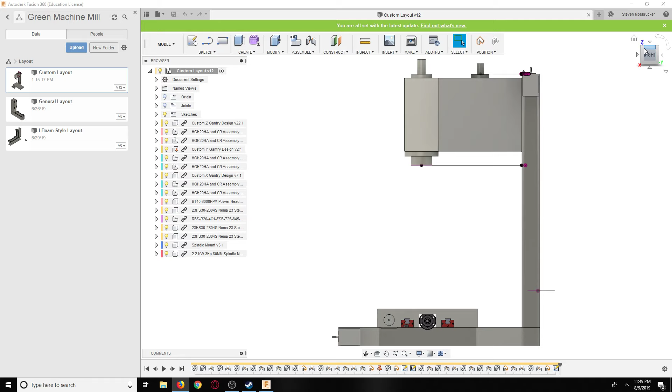So we have some pretty good news. Every time I start talking, my cat freaks out. It's super annoying.

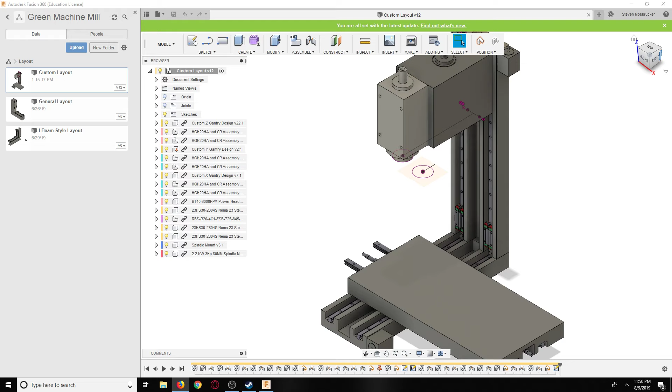Comparing the 1100M to the new series, not the old series. It turns out, like we said in the other video, that the 1100M has dovetail ways still and not linear rails, as far as what I saw. Cast iron frame and table with hand scraped ways, basically.

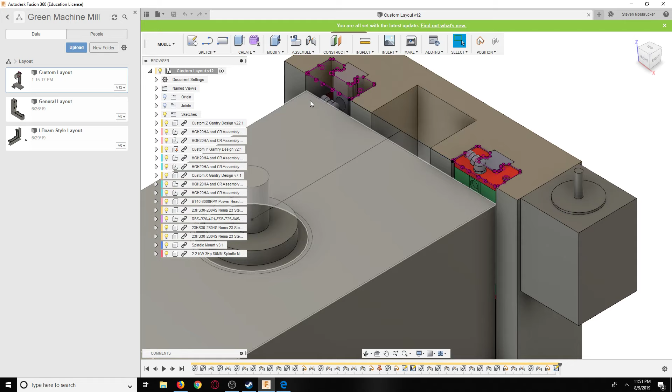So a little bit shorter there, but where we do make up for it is we are pretty much at max travel. So maybe I should put this guy in here - this will help it a little more for the tilt. Also I noticed I didn't have these set so that they move together, so I'll have to fix that at some point. But if we look here, we're at max position pretty much.

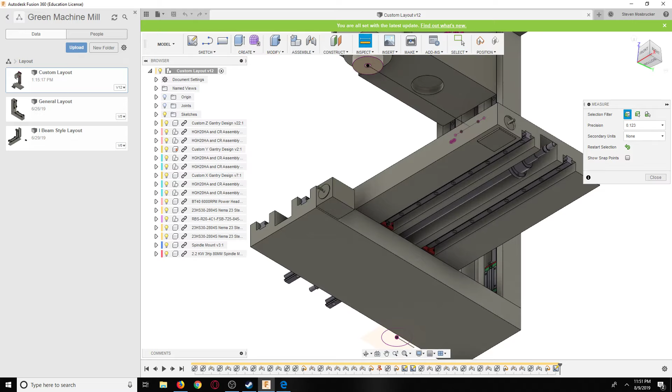One of the things is spindle nose to table max clearance. Here's the spindle nose, and of course we're going to have some drive dogs - or jaw dogs, spindle dogs, whatever they're called, the little blocks that go in here. I'll just call them drive dogs. Anyways, distance from here to the table is 19.245 inches, and theirs, max to table, is 17 inches.

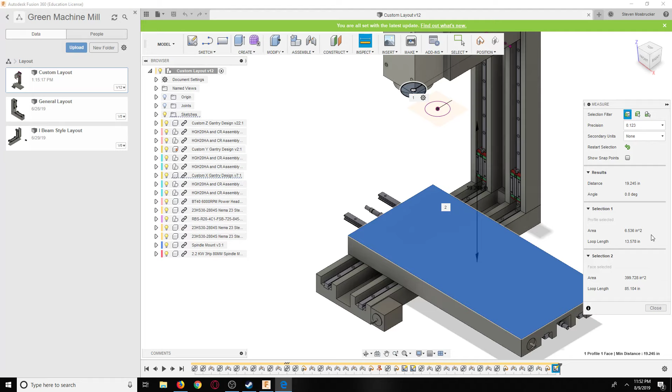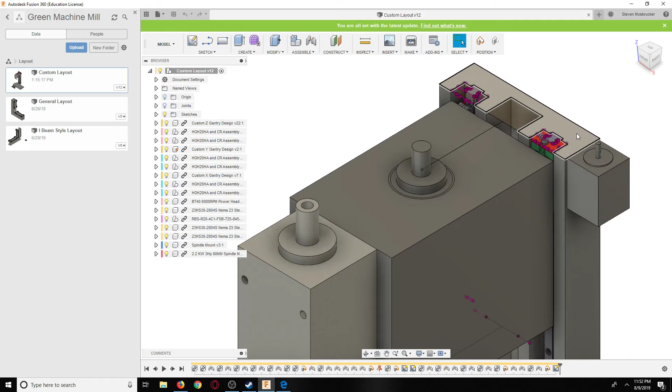So we have another 2.25 inch clearance there, and if we move this back a little more we'll have even more - down we'll have another half an inch. So it's 19 3/4, almost 20 inches, so almost 3 inches over the Tormach 1100M.

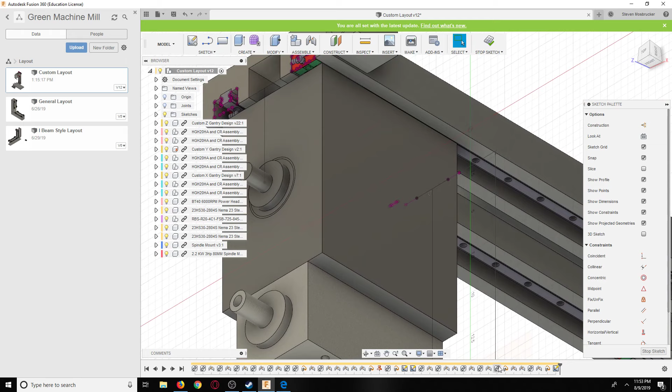Then for center spindle, which is this sketch here, spindle to column clearance - it says spindle center line to machine column. Let me rotate it. It is 13.945, and theirs is 11 inches. As you can see here, 11 inches and 17 inches max clearance.

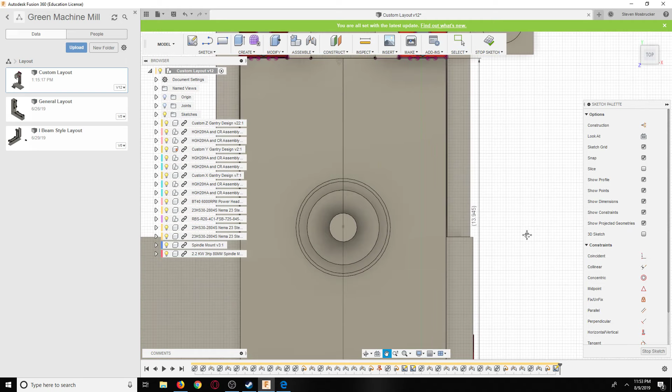So far we're right at kind of the same size, and again we're at 820 pounds. We're currently quite a bit under the typical system footprint, but theirs is 1,600 pounds, so we have another 800 pounds left. They have a lot of housing around this thing, and they won't tell me - I might need to find out exactly how much weight the machine itself is.

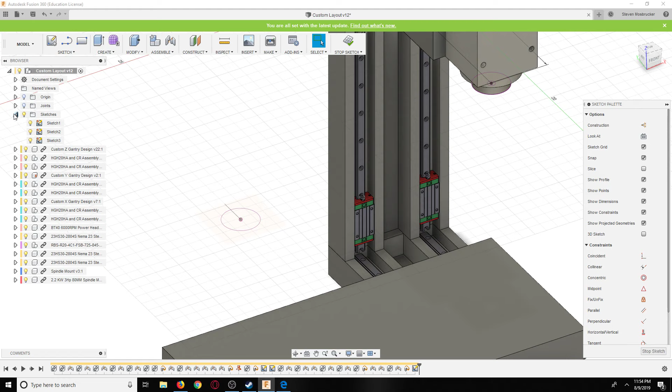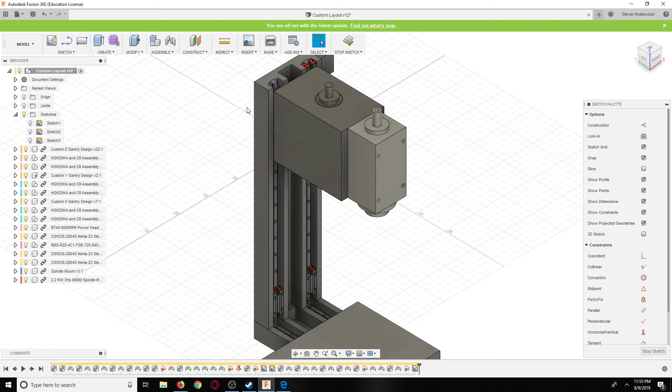In the last one we figured out how to get this guy in here. Another thing I was thinking about yesterday right before I went to sleep is holding this up, because obviously we need a counterweight. Usually they have a counterweight, but this is going to be against the wall or really close to it so it doesn't vibrate. It'd be nice to even attach this to the sheetrock, have some things here so when it vibrates, it dumps some of the vibration into the wall.

We don't have any room here, and we might have an ATC over here, an automatic tool changer, so we don't really have a lot of room here. So one of the things I was thinking is to do the exact same thing as the Skyfire CNC.

Oh, no way - do they have a... okay, so it looks like they have a new supplier in Canada, Skyfire CNC Canada. That's cool. So when you type in Skyfire CNC, that's what opens up. So ours is even bigger here than the Skyfire SVM2, which is their biggest one that they have. That's interesting, so let's go here.

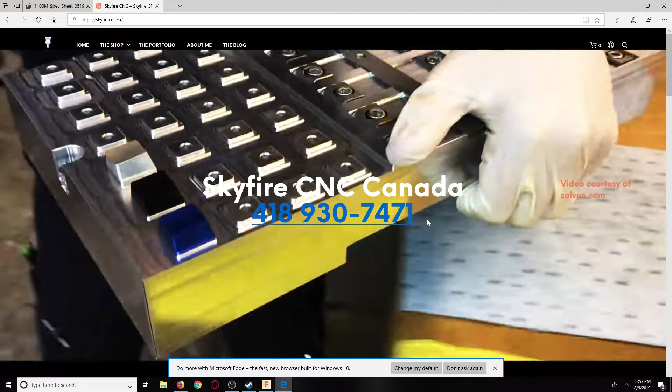So yeah, we could do this. This is definitely possible. How are they holding it down on there? Oh, they're bolting it in from the bottom? Yeah, they're drilling something in there and then putting it into the bottom. Oh, they're keyboard keys. Yeah, keyboard keys.

So let's see if we can find one. Okay, so this one has a counterbalance and it has room for a counterbalance, but... huh, so 10 grand pretty much.

Anyways, okay, so let's go to their main website. Oh, here it is. So if we go to categories and we go down here, oh, that must be their old version. Where did I see that?

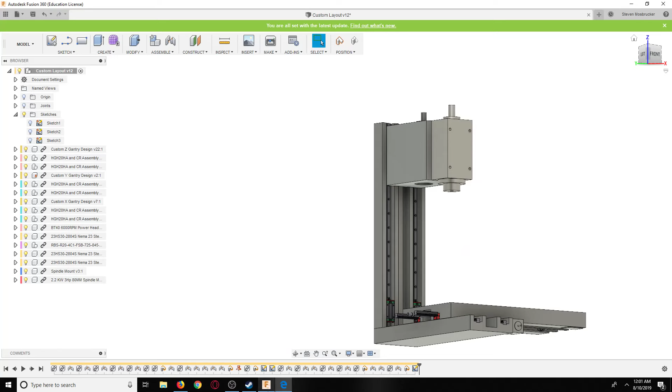The idea of why you have to counterbalance a machine is so that when your motor is up here working, you don't want it to have to hold the head up, right? Because the head is extremely heavy. I mean, ours here is extremely heavy.

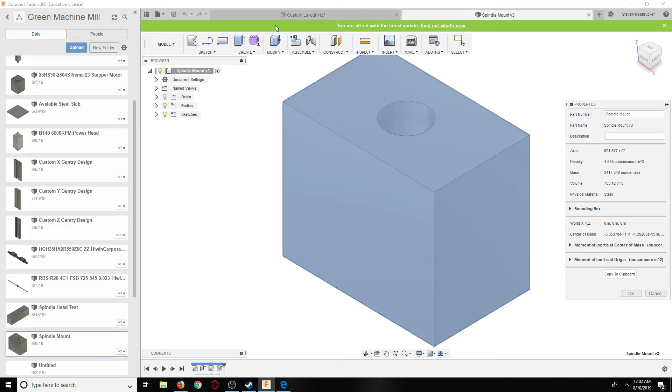I mean, this one right here is 3,000 ounces. It's 200 pounds, that block right there. Chances are the block is not going to be as heavy as that, but you could think with the motor and stuff, at least the head, we're going to have 200 something pounds.

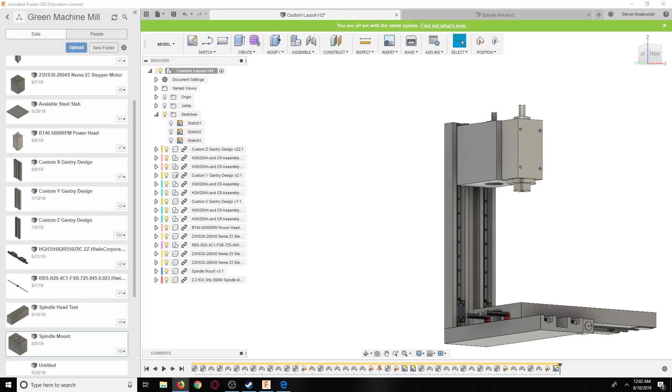And so pretty much either you need a 200 pound block hanging over here, or you need a shock that attaches here and goes up to the head, which I think is the better of the ideas, to have a shock like this. And you can see it goes up to the top of the head, and it holds the head up.

So you can see right now it's not energized, nothing's on, but the head is stationary, it doesn't fall to the table. And so pretty much what holds your head into the cut, what holds your head and thus the tool in the cut, is the motor, not the counterbalance, or not the weight of the head.

Theoretically, the head weight is supposed to be weightless. It's supposed to be zero force, because if there is a force, when you shut it off, it's going to come down and slam the nose onto the table. So you need to either hold it up with something that will still allow it to move when you turn it on, or something that deactivates when energized.

So pretty much not very many of your cutting operations are going to have that type of load, as far as pressing in, as long as you're doing everything correctly. So this, I think, is going to be the best application, because we just don't have any other place for the counterbalance. So putting a shock there, and then obviously the shock is going to have to be, depending on how long we can find, will determine where we mount it.

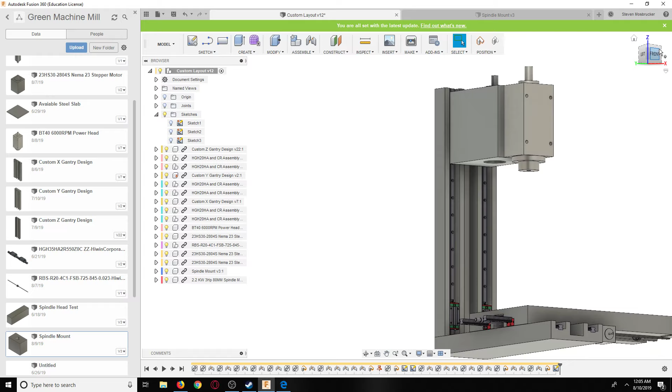So we're going to have eventually a shock from here to here when we finalize how much this weight's going to be, and then we'll look at some shocks that are comparable that go up here. So we might do that now if I can't think of something to do right off the bat. So obviously we need to put something here. Oh, and then there's an issue here. So let's change that a little bit. We gotta cut that back. 0.782.

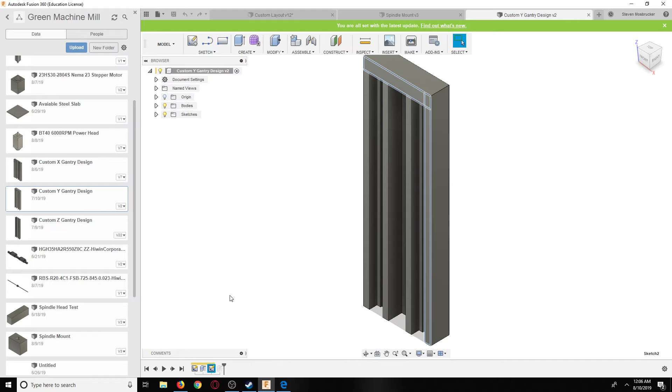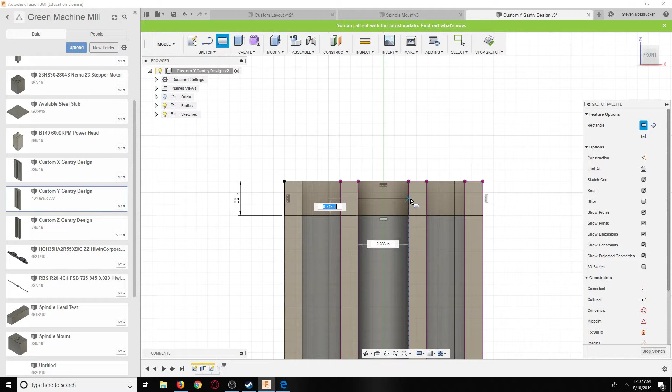I'm sure in here it looks good. And there it looks good, but over here it does not. So yeah, now it's too far there. So let's go here. There you go. Perfect. Okay.

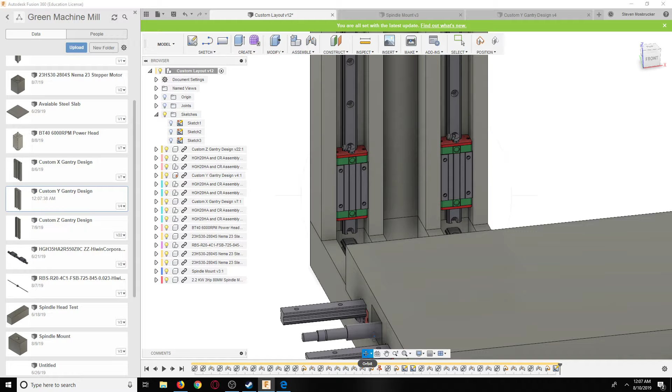And basically what we're going to have here is some sort of double bearing block that goes in that hole right there. That's about 3/4 of an inch by 3/4 of an inch up this way. So we have the ball screw go down through here and into that block, and have another ball screw go through here and into that block. And then this guy drives this guy, and then this guy's obviously belt or chain driven to this guy and holds all that together.

Okay, so one more thing, we were talking about the total travel on this, which again I think is pretty much this, 28. It's about 19, I'm gonna say, which compared to this guy, so we're about 1.5 inches. 1.5 inches over.

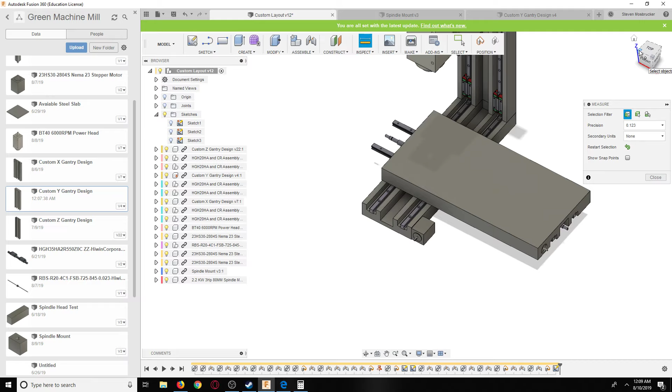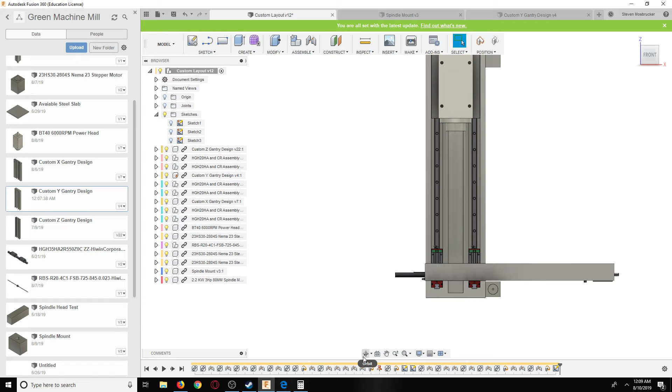Because pretty much this goes halfway here, so you lose half of this, and when it moves the other side, you lose the other half here, right? So this half here and this half here is not used, half of this at least. So 2 times half of this is 9 inches, and 9 inches minus the 28.553 is what you get. So we are over Tormach, so that's good, by 1.5 inches of their brand new machine.

And also we have what was our maximum, okay, and then let's see our volume here. So this is 19 inches. Shh. Let me open up my door here.

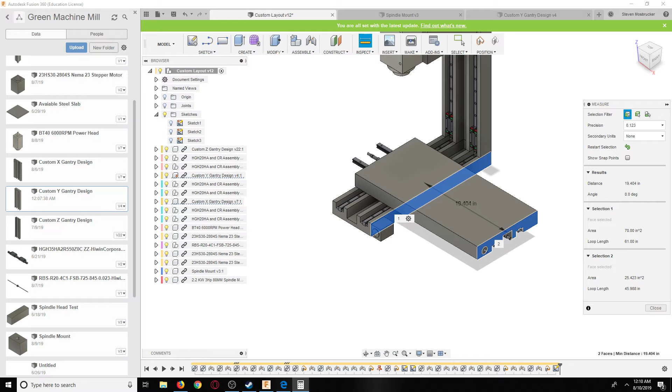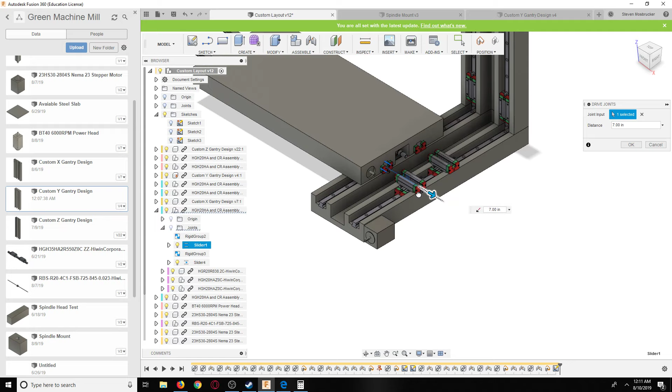Okay, so we have 19 inches here. So I'm going to say 19.4 times 2 plus 19 is 57. Oh, but we subtract 9, I think, here. Okay, so let's do this again. 19.404, and let's do this for the last time because I know I've done this a couple times. I still don't know why this thing freaks out so much. That is really, really close.

I mean, we'll see, because another thing I want to do down there in that space is that's where my bamboo plywood's going to be. But then again, I don't think I'm going to actually store the bamboo plywood. That's for the Eco-Base 3D printer. I think once I get it, I'm going to chop it up and then we go from there. So I don't think that I'm actually going to store the bamboo, so we could have that location for that material. And then I think that we would store the full size plywood elsewhere where it's not as usable space, because right there it's pretty usable.

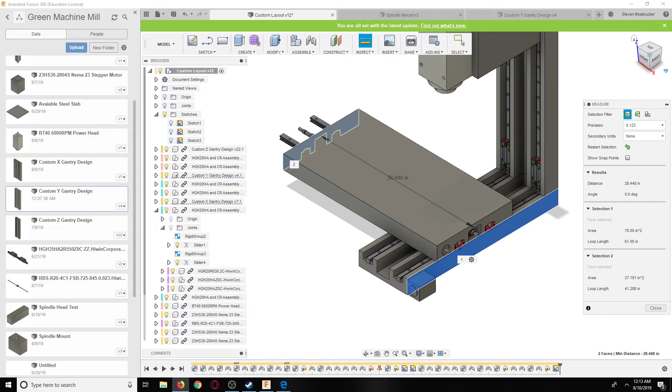And I'm thinking that could go up against the back wall. I have kind of an idea of where it would go, where it's not in the way. And obviously that's 4 feet wide, which goes out into the room. So we can't get a car even further deeper in there because you would hit a 4-foot piece of bamboo plywood. Because again, we have a 29-inch depth to go into the room, to where you're going past the cabinets, and now you're taking up space. And that's 4 feet, so that's 48 inches. That's almost double that. So I'm thinking we're gonna store that elsewhere.

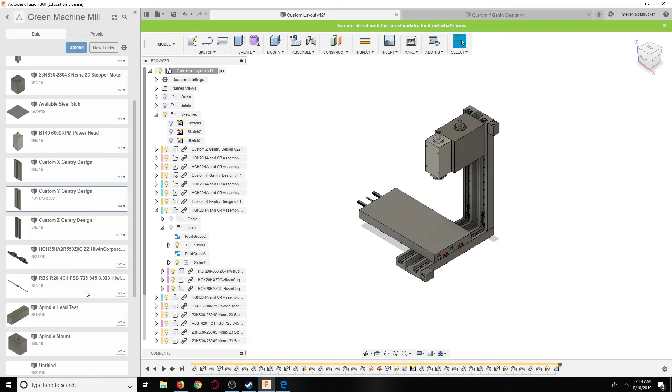Okay, so I haven't done a whole lot in this video. Just kind of talked about what's next, and this does look really, really good. So the next couple things are looking at these ball screws. I'm going to talk to these guys at Hiwin about their ball screws and see what's the best deal, what's the best idea for me, and also what are their best thoughts on supporting these guys.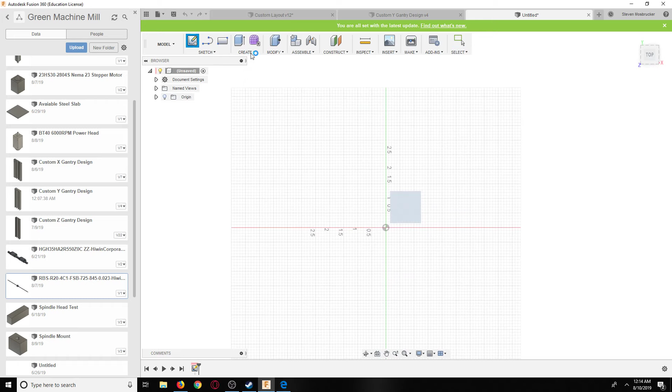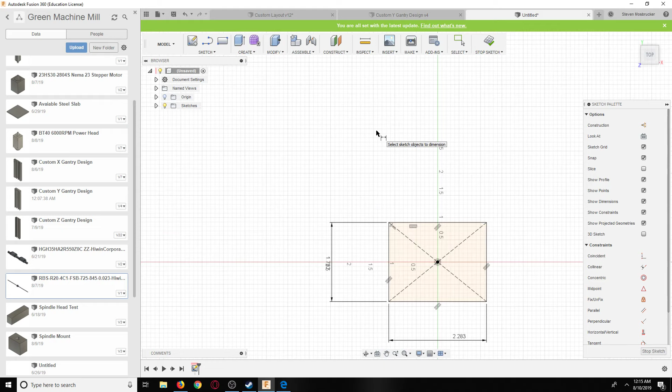So I'm thinking that we're going to have something in these holes, let's say. So this is 2.283, and I think this is the same. No. .283. 1.782. Okay, and then basically it's going to be, wait a second. That's not right, what I did. That's supposed to be how tall it is. This one could basically be 1 inch depth or whatever this is here, because right now it's protruding out about the same amount.

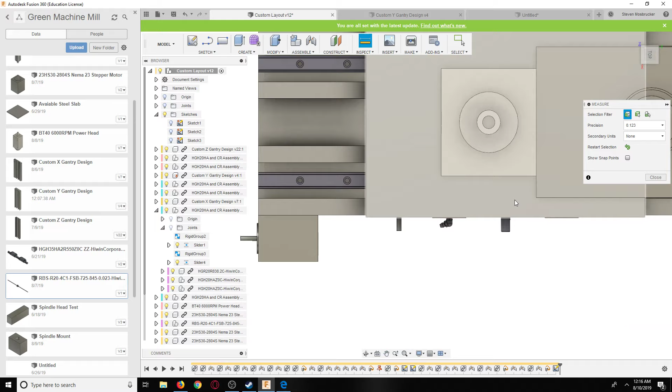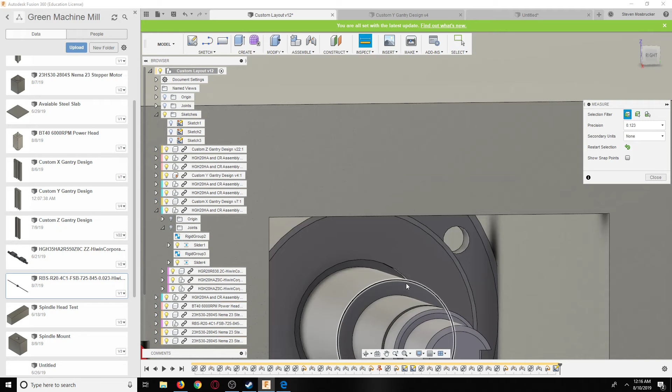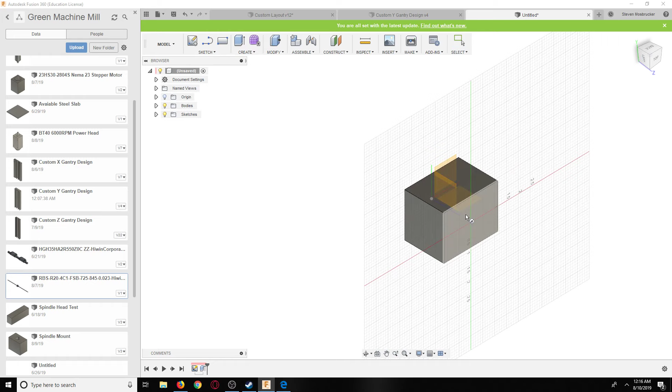So let's just say that we go in here and we support around this. Actually I think this is the start of the screw. This is the bearing right here. 0.591. How far back is that? That's 1.662. Cool. And then basically we have a bearing that goes in there. Or this could even be a bushing. We make a brass bushing or whatever. What was it, like 0.591? Yeah, so this, as you can see, is where the thread's supposed to be. 591.

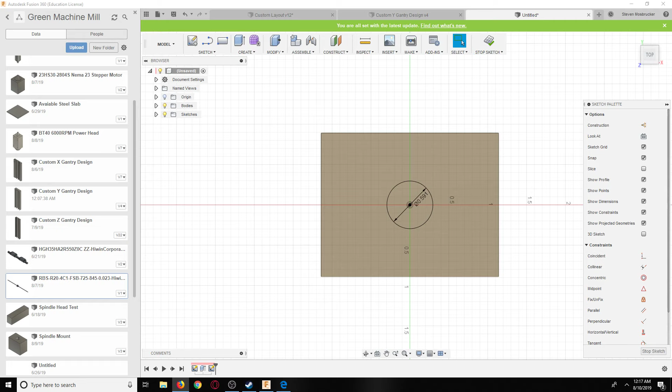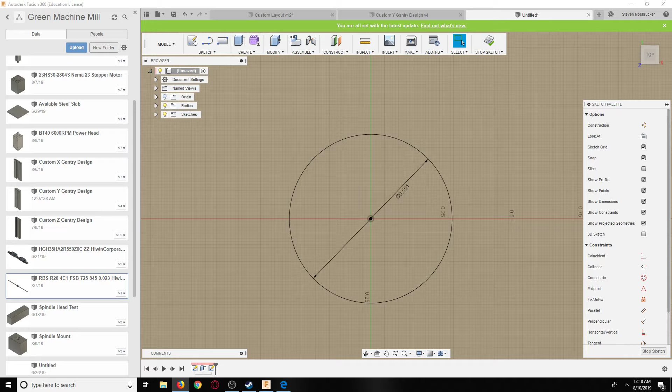And let's see if that's got a close millimeter. 591. It's 15 millimeters. 15.01, so basically a 15 millimeter ID bearing. VXB ball bearings, 1532. 6002 pretty much it looks like. Okay, so let's write that down. 6002 bearing for 2005 ball screw. 2005, 2004, or whatever. Okay, so this is an open ball bearing.

Can I find a deeper one? Because how deep is this? I like to support the whole thing. 1.12. That's about 27 millimeters. I don't know if I'm going to find something like that. I could press two, one at the beginning, one at the end. This one's 11. Nine, 32 with 9. 15 millimeter, 9 millimeter. So the best we could get is R202, 15 by 35. So let's look at that, R202. Wait, what? 6202 RS.

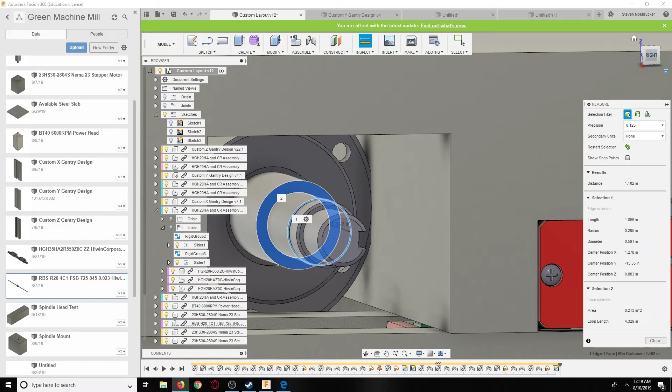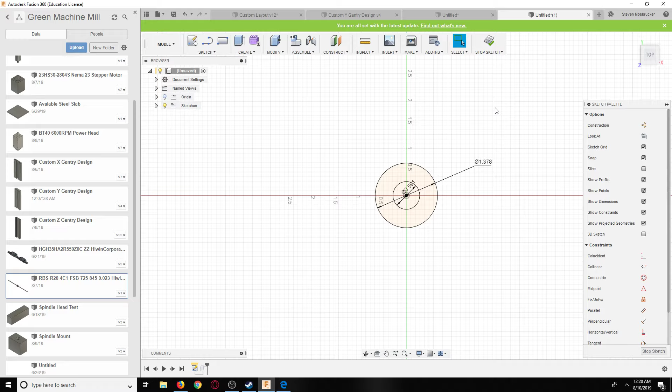So this is, but this is 35. Oof. Center's 15. And the height is 11, so we probably use 2 of these guys. So this is a 6202 RS bearing, and this is 35 millimeters. Bam, perfect. Looks good. Press it through. Ball screw bearing support assembly.

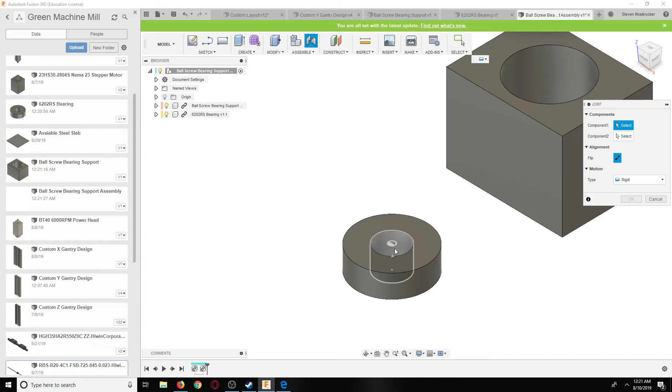And again, this says 27, so in this case we'll do 22, so there's just going to be a little bit of overhang in the middle. These other ones are 9 millimeters, so we can't really... I mean, you could put them together. These are 9 millimeters, and the hole is 27 millimeters. 9 times 3 is 27. So maybe we could press a couple of them on this guy, and then have it fully supported. I think that's probably overkill, but.

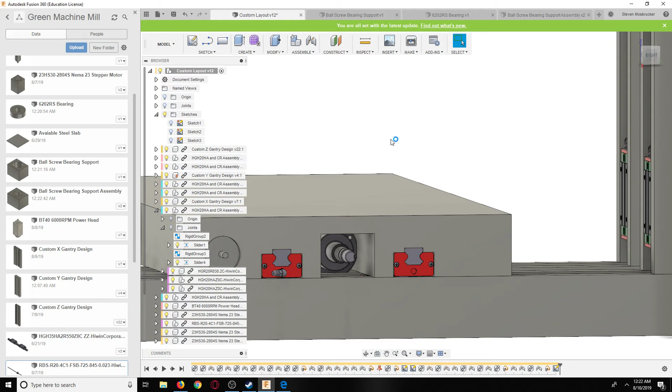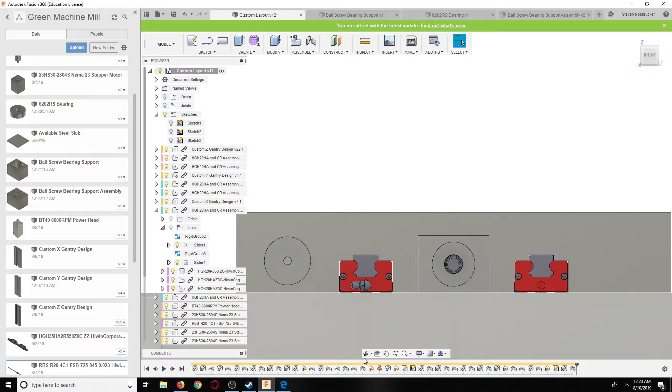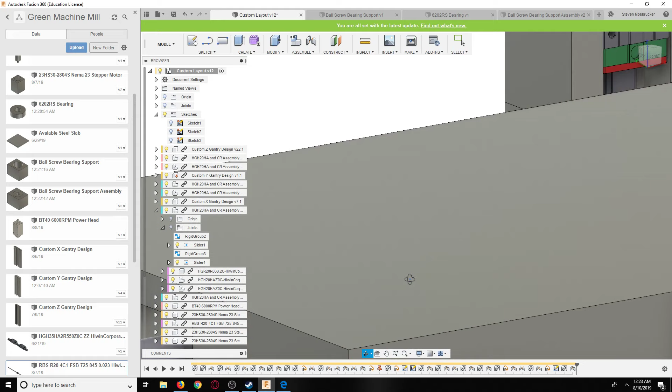And of course, piece of steel. And really, I haven't done this much steel, but that looks okay. And there you go. Now it should be fully supported and just that piece comes out. And so basically pull it back all the way. And this guy needs to come in further, same deal as the other one. So we can measure this. And then also we would have another one up here at the top.

Man, I really don't know why it does that. That's fine. Let me just rotate it down here. There we go. And there you go.

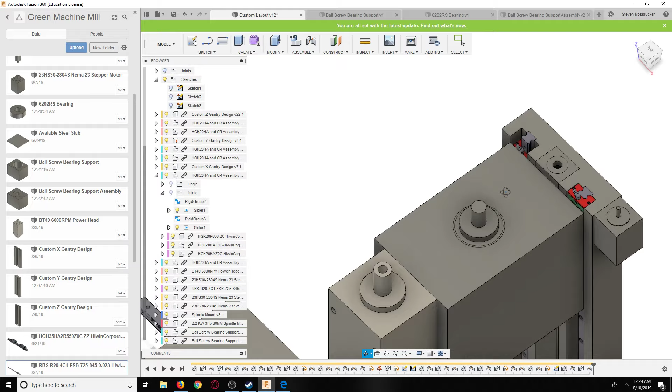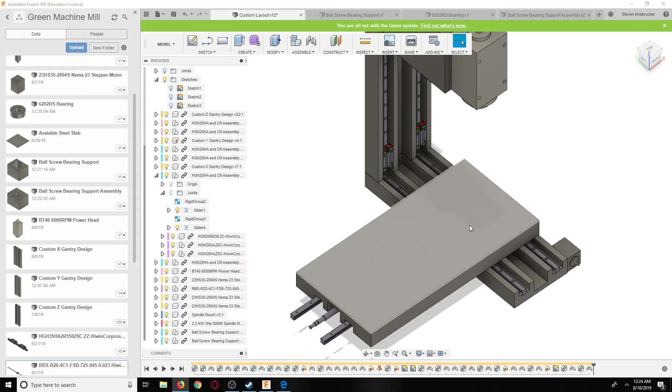So now we either have this one or again, we could press in three of the other ones. Obviously that's like $15 worth of bearings, because these are $3.95 a piece. So 3 of those, you're talking 12 bucks. But for extra support, it's pretty good. But this has already got double support, so even this is probably okay. So we got 2 here, and then we would need another one here.

Bam. There it is. And then we would need something interesting here, pretty much where 1 3/4. What time are we at? Almost 40 minutes. I mean, we haven't done a whole lot, so maybe we'll look at doing this one last time.

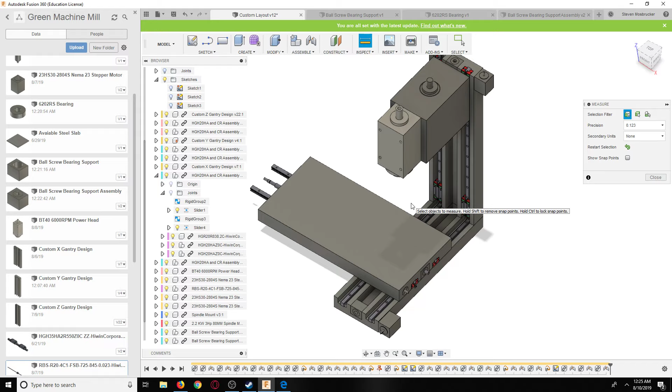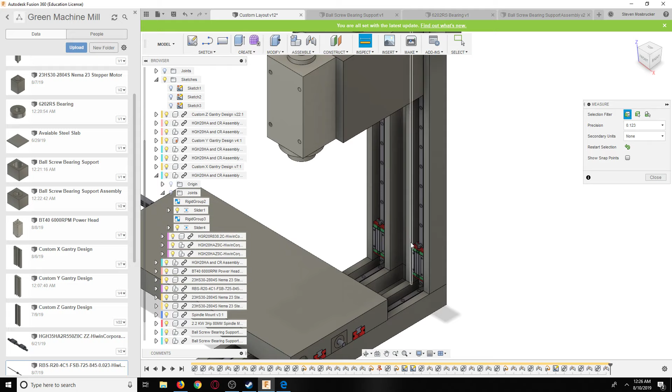So I'm thinking this guy be short. So pretty much what happens is half of this is pretty much where this is, and then it comes down and goes into it. Maybe it's slightly taller because again, we're not going to go all the way down. So we can look at it that maybe that one. So what was this one? This one was 1 inch, right? What was the depth of this?

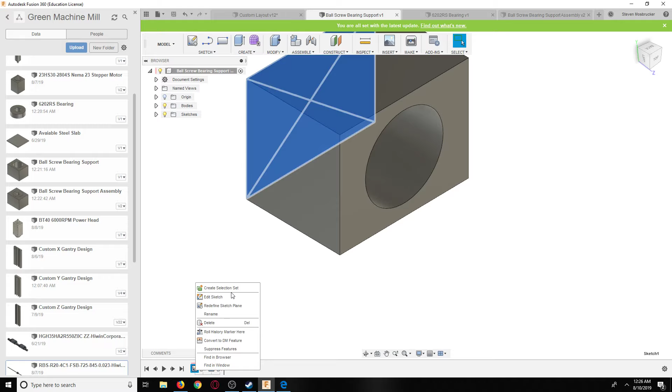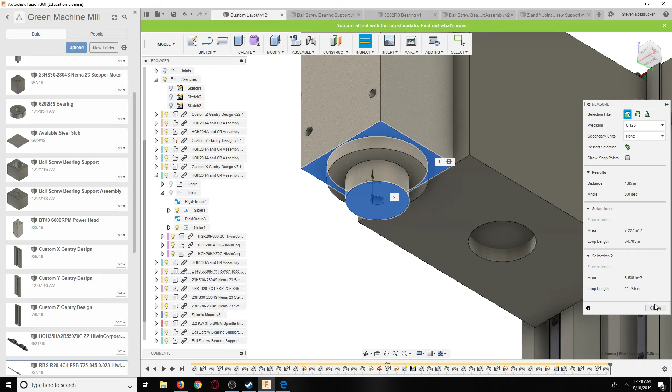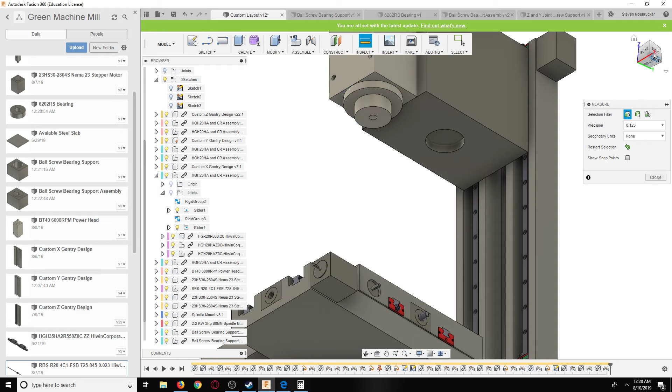So what I would like to do is keep this free and have this other one go about 1 inch higher, because the spindle obviously goes below 1 inch anyways, so it's not going to go all the way down to begin with. This is 1.85, so we don't really have that much room. But this is sticking up way above. So 1.85, plus the difference between this and the floor. 2.5 pretty much. 4.351. So we have plenty of room.

Alright, so basically what we're going to do here is we're going to do that 35 millimeters. So the sketch again, we're going to have pretty much from here to here, and we don't need to make it any longer than that. So 1.782. So let's do it from the top here. I'm already in. So was it this one? 1.782 there, I think. All right. Oh, yeah. And 2.283. Okay.

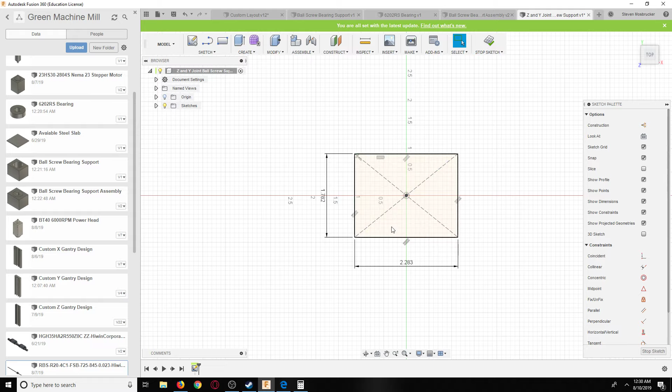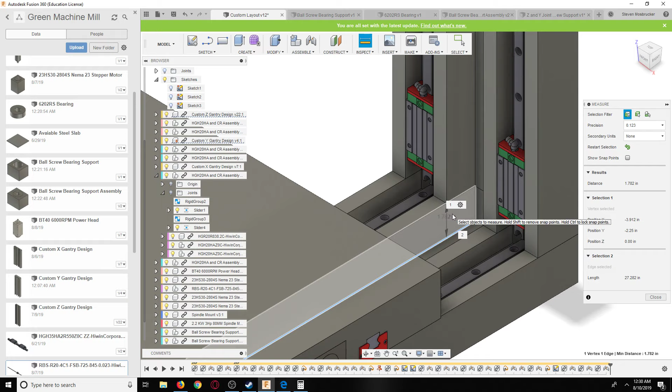And then if we remember, this guy is basically that depth, 1.662. And again, it's not going to be exactly that because that's maximum. Okay, so it's going to go all the way down before hitting the ground, so that's fine. I was making sure that this was tall enough. Okay, and then it's going to go that way. Oh, it's got plenty of clearance. Oh no, because it's going to hit the other shaft. So we need that plus 1.662.

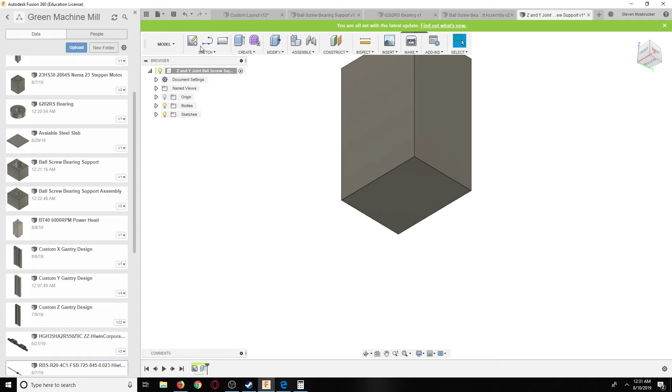So we need this 1.782 plus this 1.662 equals 3.444. And then down here, 2.283. It's not that, it's this to that. 1.782.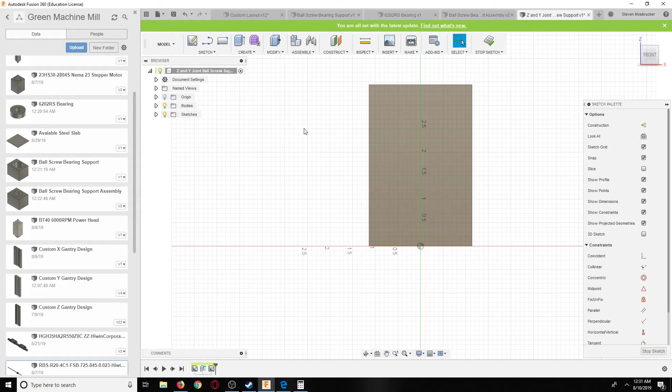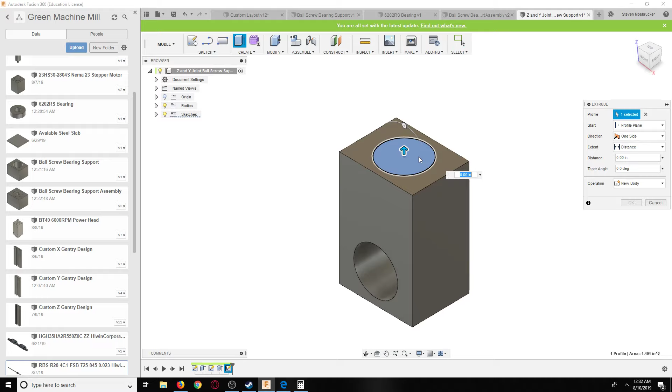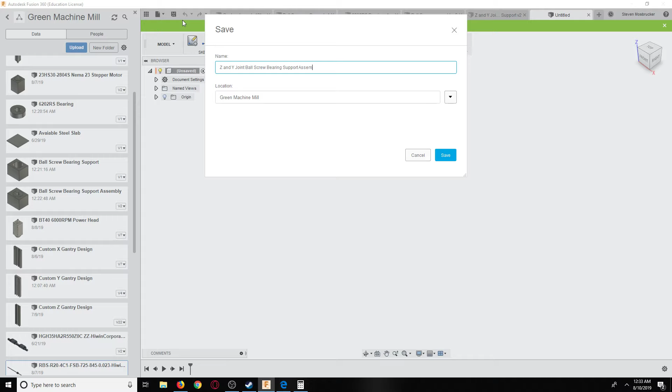This is going on way too long now. What are we at? 45 minutes? Yeah, 45 minutes. But we're almost done here. Oops.

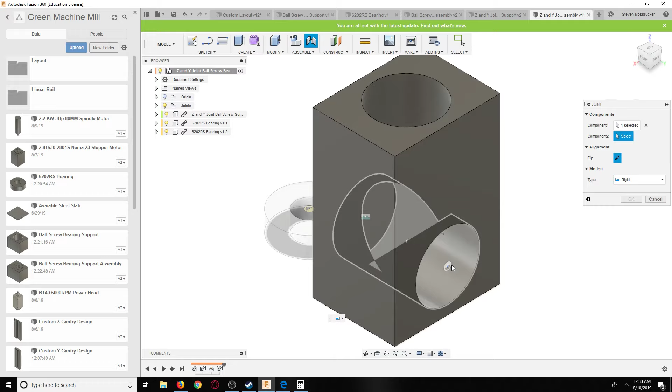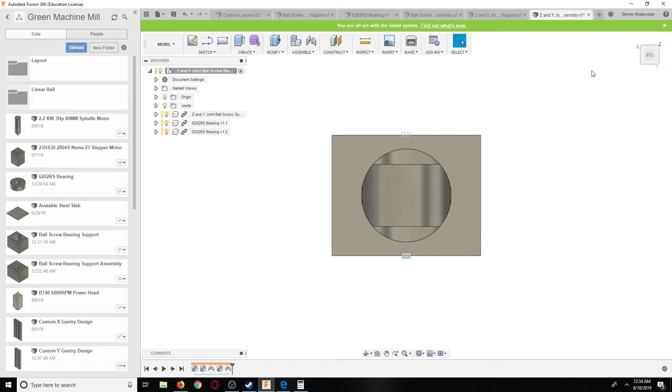One. So now is where it helps to have a little bit of clearance there. I mean, we don't have a lot, so if you look down, you should see just a little bit of space. But I think these are actually spaced out where that will clear. Nope. Well, that's 35 millimeters, right? No, it was 15 millimeters. Oh yeah, it'll clear. So it doesn't even have to be as long as it is. But anyways, ooh, that's another thing. How am I going to get it down at the bottom?

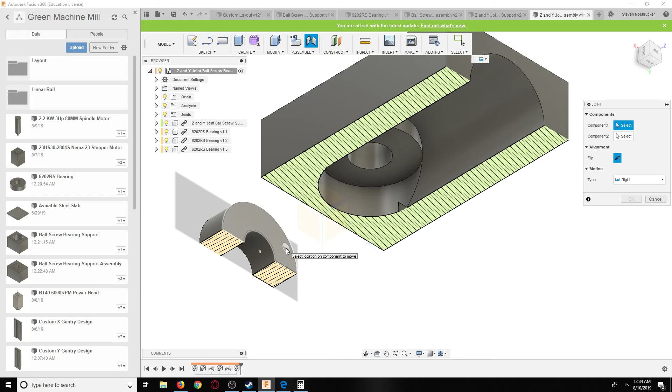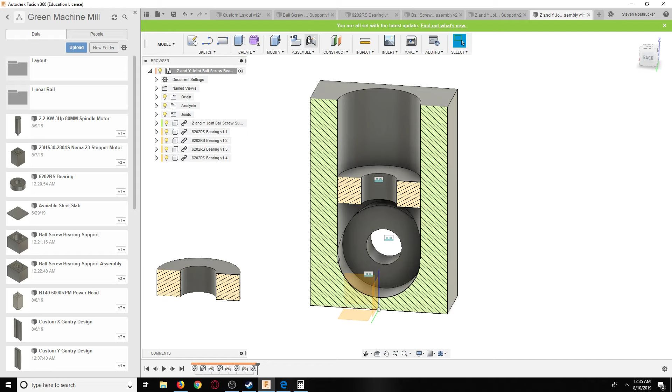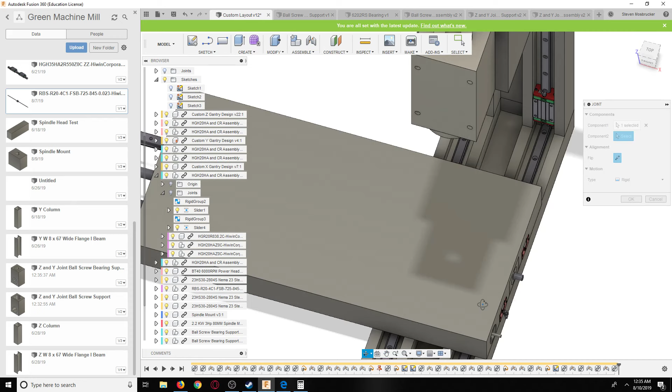Let's do this. Inspect, section analysis, origin. Turn off the body. This body. Turn back on. New joint. I think that's the bottom. Question is how exactly do I even press that in there? That's a good question. I mean, I pretty much have to push that in first because you can't see otherwise. But cool. And there you go. Alright, let's drop it in, call the video over. So, beautiful.

And there it is. Alright, so right before we leave here, let's go close this. Let's do properties. 13,550 divided by 16. We're at 846, so we added another 20 pounds.